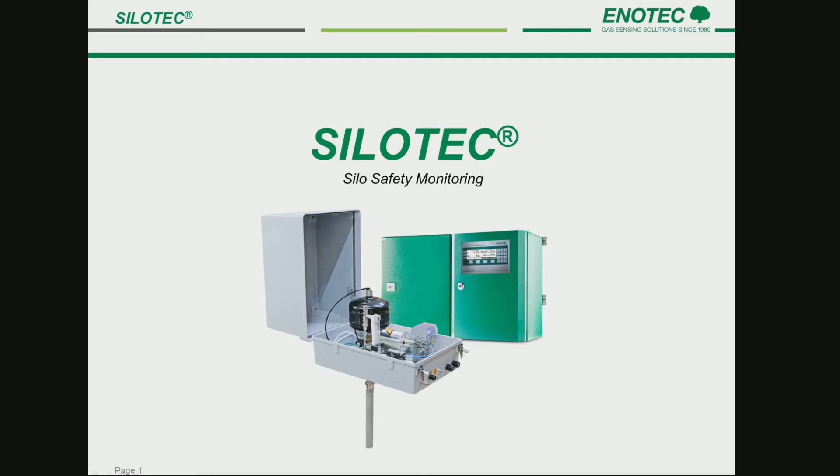Coal and pulverized coal are often used as fuel in many different applications for the generation of heat or steam, such as in power, cement or asphalt plants. To ensure a continuous supply of fuel, the coal is stored on site in large silos and coal bunkers that can hold several hundred or even thousands of cubic meters.

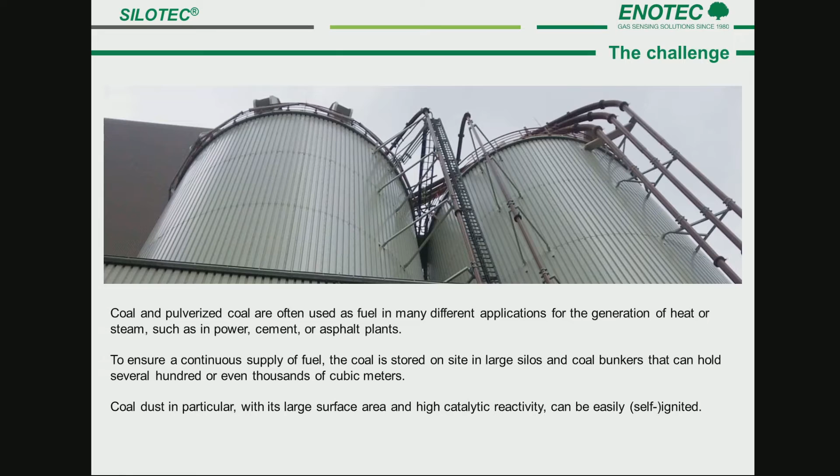Coal dust in particular, with its large surface area and high catalytic reactivity, can be easily self-ignited. As a result, there are hundreds of thousands of coal dust silos in the world, with a potential risk of dangerous malfunction due to smoldering fire.

Such an undetected smoldering fire would lead to one of the following scenarios. Explosion of the silo, especially when the silo is filled with new coal dust by means of compressed air. An undetected smoldering fire can lead to an explosion of the entire silo if the pressure cannot escape quickly enough.

Flash fire: if the combustion of the coal dust is slow, the pressure increase caused by the combustion is discharged through the explosion flaps.

100% smoldering: even if the coal dust only smolders completely without a dangerous risk, this would be an enormous and avoidable cost and interrupt the production process.

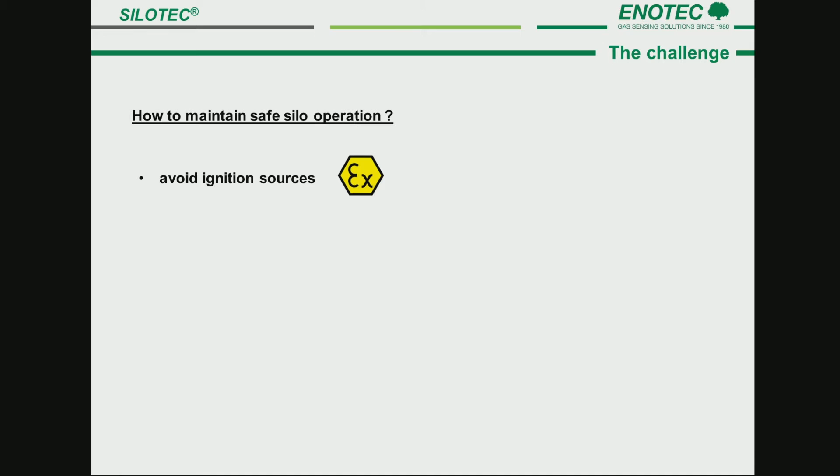So, how to maintain safe silo operation? It's the operator's responsibility to analyze potential combustion or explosion risks and take appropriate preventative measures, such as first of all avoiding ignition sources, such as non-compliant equipment.

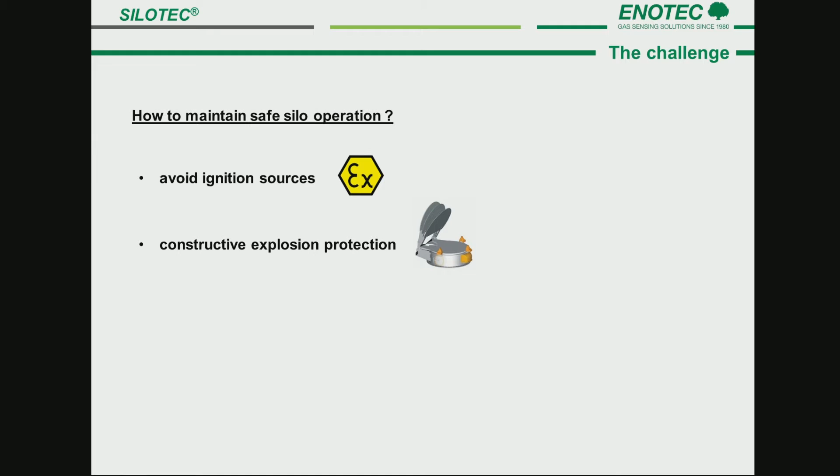Constructive explosion protection, such as having explosion flaps or ensuring that the potentially explosive dust does not egress from the silo; ensuring permanent inertization with, for example, nitrogen, carbon dioxide or argon; and silo monitoring combined with fire extinguishing systems.

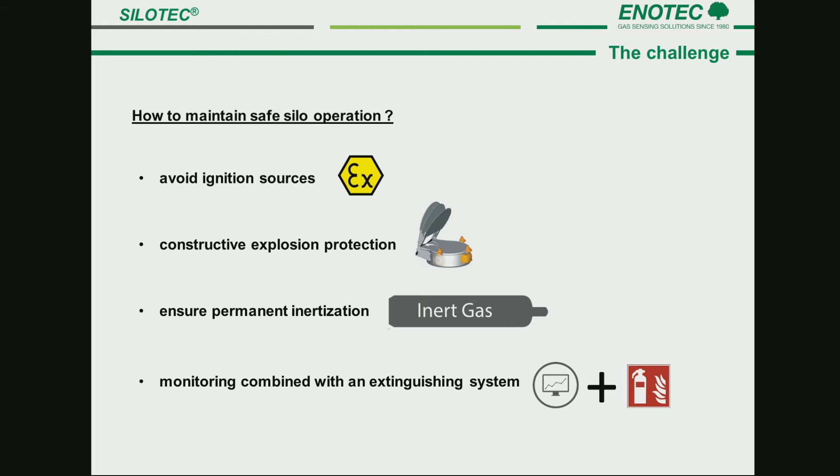So which safety monitoring methods are available? First of all, we have temperature measurement. Here we see the temperature sensors.

Temperature measurement is a long-known measuring method and is often used for monitoring silos because of the lower purchasing costs and simple installation. The technical disadvantage is the limited temperature sensing radius, which corresponds more to a point measurement than a representative measurement for the complete silo.

It's possible that the coal starts to smolder and the sensor does not measure the temperature increase because it's simply not close enough.

In order to compensate for this, many temperature measurements would have to be installed and distributed over the outer walls of the silo, which in turn would lead to an increased installation effort and limit the price advantage of the measuring principle.

In case of a temperature increase caused by smoldering coal, the temperature sensors will detect this at some stage, albeit with a delay. This delayed response poses a potential safety risk during this critical time when the inertization process should be initiated. So for these reasons, the temperature measurement is not representative of the gas values inside of the silo.

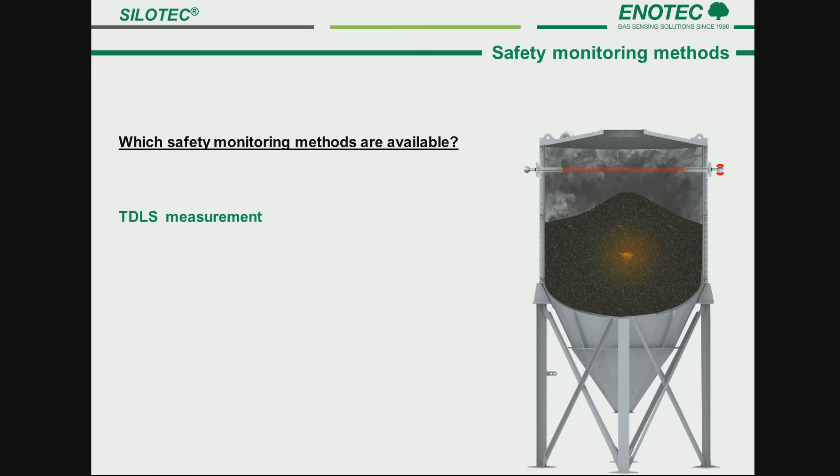Next, we have the TDLS measurement. The TDLS, or tunable diode laser spectrometer, in the cross-duct version, meets the ATEX requirements and is a fast and representative measuring principle for the detection of smoldering fires in silos.

Rather critical is the availability of this analyzer during the silo filling process, usually with compressed air, which is the riskiest operating condition of a silo. During the filling process, compressed air drives the inflammable coal dust into the silo.

Newly introduced embers or existing smoldering fires in the silo are actively supplied with oxygen and can possibly ignite. Exactly at this critical moment, when the dust is very dense because of the turbulence caused during the filling process, the laser signal is less stable and therefore less accurate.

To correct this problem, the analyzer optics need to be continuously purged with an inert gas, which will not interfere with the measurement, which makes this measuring principle maintenance intensive.

The high capital expenditure for the analyzer, as well as the ongoing maintenance requirements, makes the TDLS the most cost-intensive method for silo safety monitoring.

Here we have the classical extractive gas analysis. Extractive gas analysis is considered a recognized ATEX-compliant measuring principle which delivers representative silo gas values.

Here the sample gas is transported with an ATEX-approved gas sampling probe on the silo roof via a heated sample line to an analyzer cabinet located at floor level. In comparison to TDLS measurement, reliable process data acquisition is also provided during the silo filling phase.

The main disadvantage of extractive gas analysis is response delay due to the length of the sample gas line. In case of an emergency, important time for an appropriate reaction on the part of the plant operator is lost.

Components which come into contact with the process gas, such as pumps and filters, require increased and continuous maintenance. In addition, not every plant operator is able to provide appropriately trained personnel for typical maintenance and needs to use external companies. Also, the purchase price of this measurement is relatively high, and as described above, is associated with follow-up costs for material and service expenditure.

In-situ gas analysis takes place in close proximity to the process. Here the sampling probe, approved for ATEX Zone 20, is directly connected to the O2 and CO sensors in a housing certified for ATEX Zone 22.

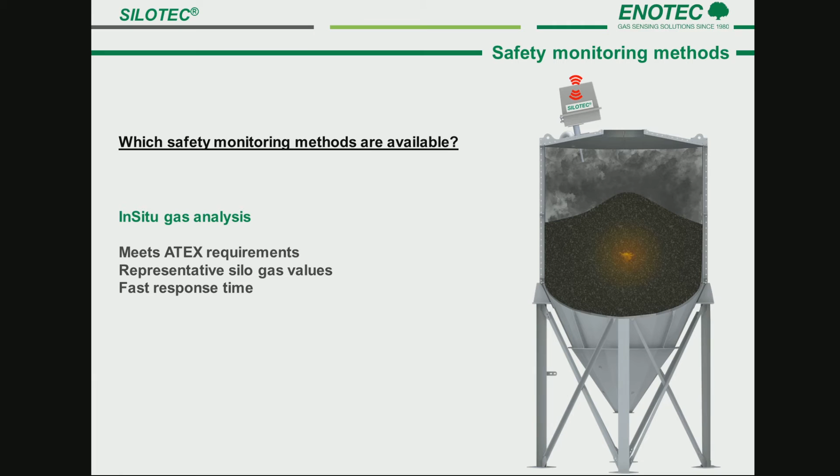So the system meets ATEX requirements and delivers representative silo gas values. The response time is fast as the sensors are directly at the silo. No maintenance is required; the probe is purged automatically by a blowback module when needed. The inertization quality is continuously monitored by the additional O2 measurement. The analyzer is budget-friendly and generally requires zero maintenance.

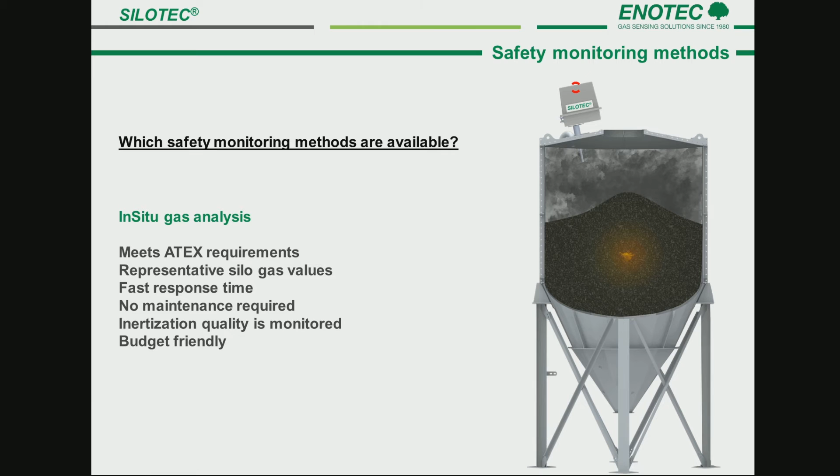Why measure O2 and CO? The most important gas molecule to monitor for smoldering fire protection in a coal silo is CO. CO is produced when carbon from coal and O2 in the air react during an incomplete combustion. Such a measurement is mandatory in Europe for silo capacities greater than 120 cubic meters.

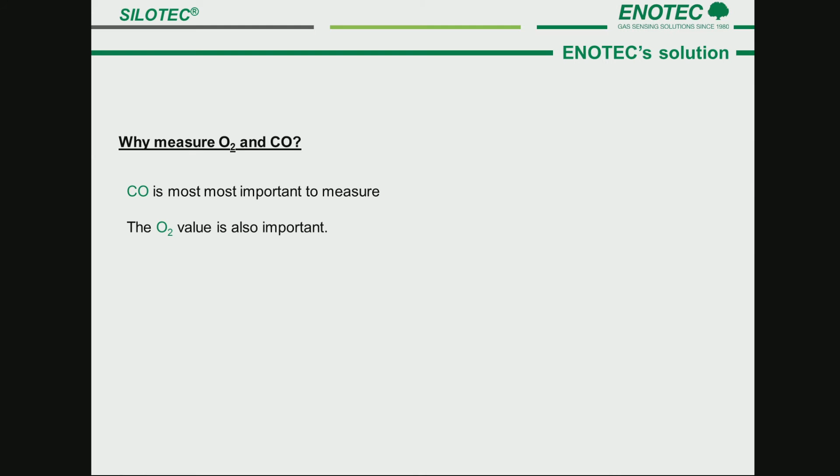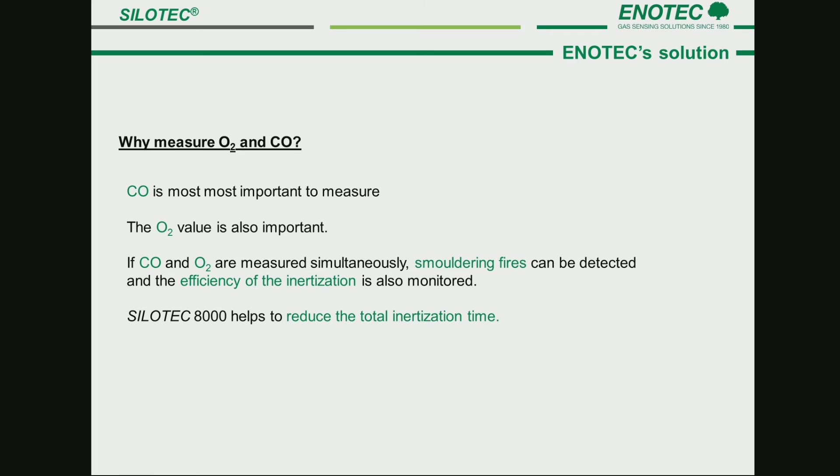The second molecule to measure is O2, as it indicates how inert the condition in the silo is, and is always related to the CO concentration if a smoldering fire is present. During a combustion process, the O2 concentration will drop. If CO and O2 are measured simultaneously, smoldering fires can be detected and the efficiency of the inertization is also monitored. SILOTEC 8000 helps reduce the total inertization time efficiently, which also saves costs.

This diagram shows the sequence of events should a smoldering fire occur in a silo. Blue represents the oxygen value in volume percent. Red represents the carbon monoxide value in ppm, with a CO limit alarm set to 4000 ppm.

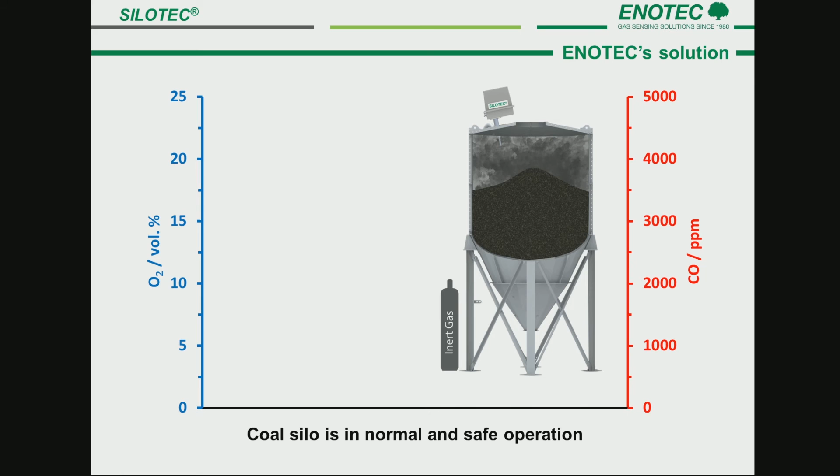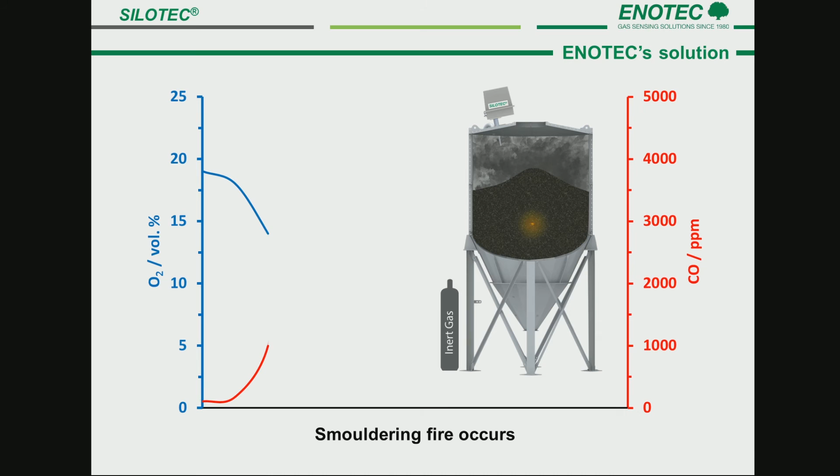First of all, we see normal and safe silo operation. The plausibility ratio described earlier can be seen when a smoldering fire occurs: the O2 reading drops from near ambient air conditions, and the CO reading rises. When the CO limit value of 4000 ppm is exceeded, SILOTEC 8000 triggers an alarm, and the plant operator starts inerting the silo.

The benefits of SILOTEC 8000 go beyond CO limit value monitoring, which is important from a safety perspective. Using the O2 value, the plant operator can monitor the inertization with regard to speed and quality. He can immediately recognize if the inertization is successful because the O2 value has dropped towards zero, and can stop the injection of inert gas. This allows him to stop the inertization in a targeted and timely manner, saving the expensive inert gas.

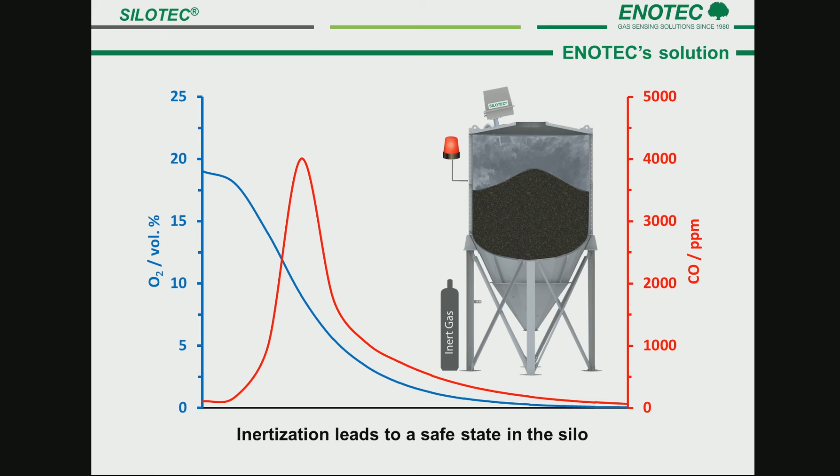So what is the SILOTEC 8000? SILOTEC measures oxygen and CO directly at the process. The probe is mounted on the silo roof, while the electronic unit and blowback module are mounted at the bottom of the silo.

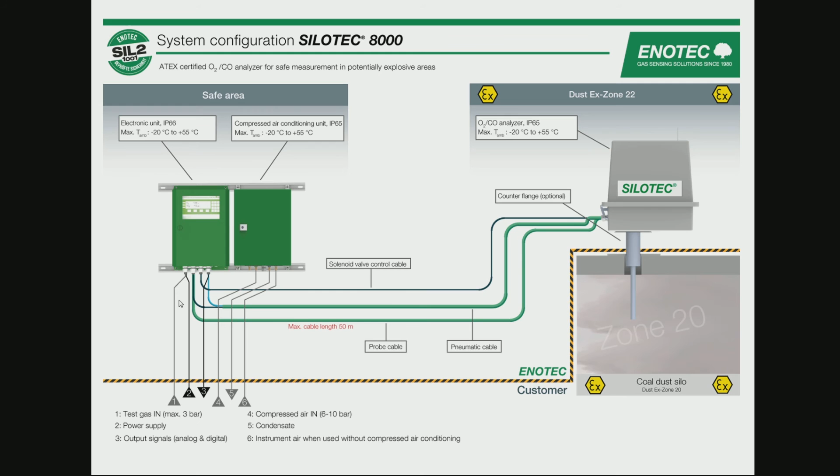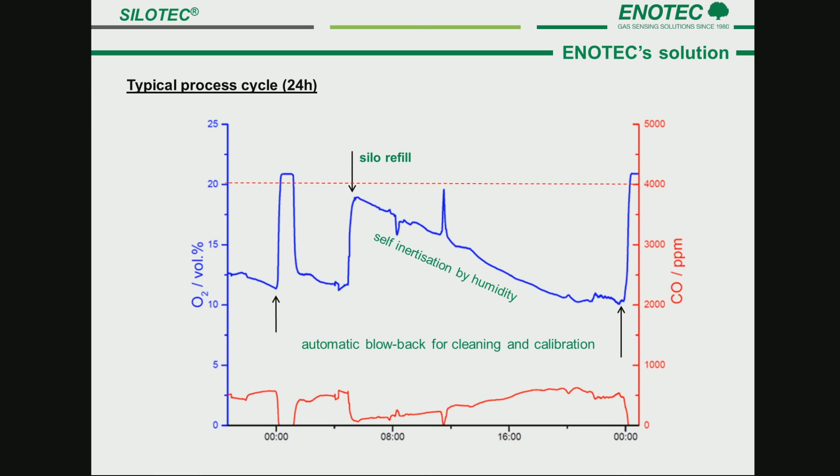In relation to the CO limit alarm of 4000 ppm, very low ppm concentrations in the silo do not indicate a smoldering fire, but they show the permanent reactive capability of the CO sensor, and its slight changes correlate with the O2 concentration in the silo.

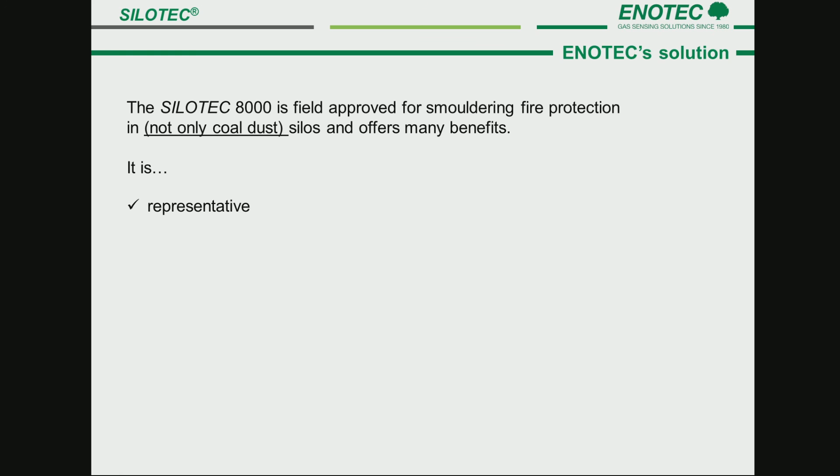So the SILOTEC 8000 is field approved for smoldering fire protection in coal dust silos and offers many benefits. It is representative as a gas measurement for the complete silo. It's compliant with ATEX Zone 20. It's fast responding to even small changes of the gas composition.

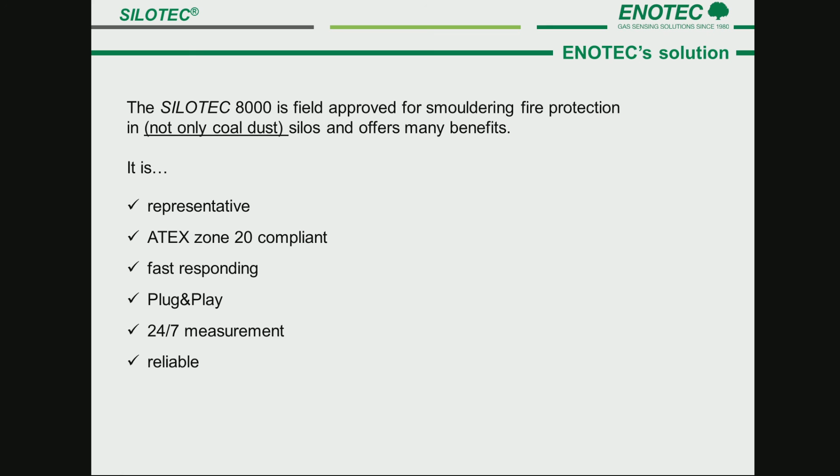It's plug and play, easy to install, and does not require maintenance. It's a 24/7 measurement, simultaneously measuring the early warning indicators CO and O2. It reliably triggers the silo inertization and monitors the inertization process.